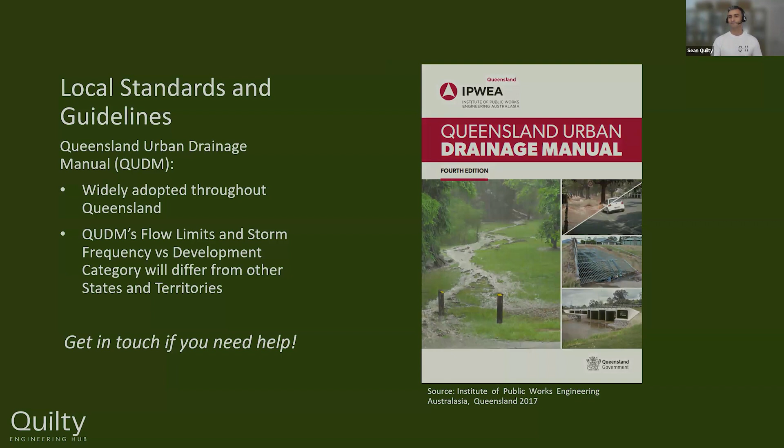So today we're going to first look at the terminology of inlets, just explain some of the key words, because it does vary slightly, especially if you start working in different states and territories - we like to use some different names. We're then going to go into the flow limits, so before you actually size and design a stormwater inlet, you've got to understand how much water is actually heading towards that inlet. Then we'll talk about some flow terminology - there's different types of flows, if it's approaching the pit, if it's going into the pit, and so on. And then finally, we'll look at how we can read inlet charts.

And hopefully I come bang on time and we'll have heaps of time for questions at the end as well.

All right, so what we're going to be focusing on today is all about stormwater inlets, but it's really focused on urban environments, so where you've got your typical roads with kerb and channel.

Typically when we get into those urban environments, they're really densely populated. So you'll have subdivisions, CBD, really heavily populated areas. And that comes with a few constraints.

Spatially, we don't have a lot of room, so we've got to try and manage flooding within a really small amount of space. Everything's just jammed in. We've got a lot of vehicle movement, so we need to think about how people can actually drive safely through rain events and flooding events as well. And we've got a lot of pedestrians moving around as well.

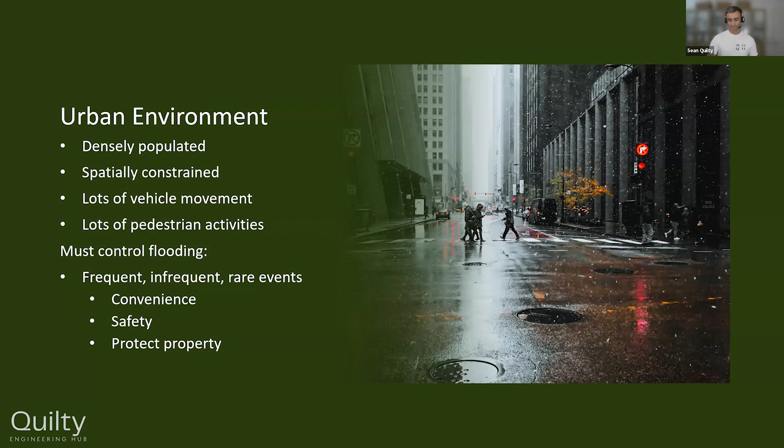So that's kind of what we're dealing with when we look at urban environments. So how do we solve this? Well, this is where longitudinal drainage comes into it.

Now longitudinal drainage is kind of the technical term, but you'll hear in the industry probably more often pit and pipe. So if you're looking at a pit and pipe design or system, this is what we're talking about - a combination of stormwater inlets connected with a series of underground pipes. It's all a gravity-based system, so it relies on these pipes being laid on a grade, so all that water will just flow under its own gravity and empty out.

So these systems are designed typically to be free draining. Once the rainfall event's finished, all these pipes drain out and they're dry, ready for the next event. So the majority of pit and pipe systems in Australia pretty much discharge to either a creek, a river, or an ocean. Or if we go inland, there might be some decent sized dams, but it's pretty much free draining for the majority of Australian environments.

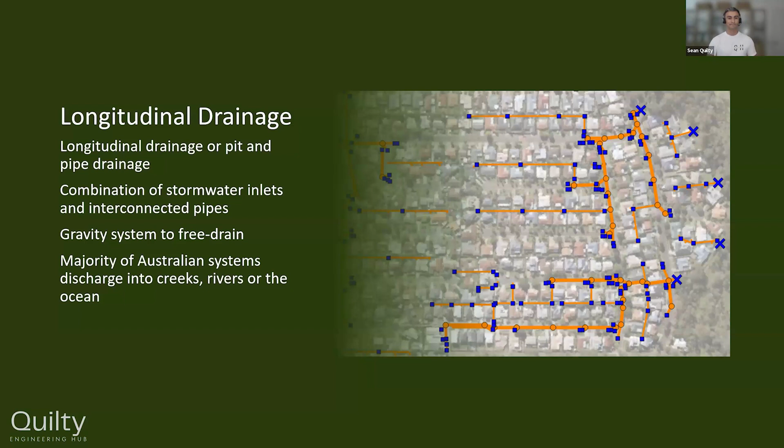So this is where we use longitudinal drainage - we need to reduce the flooding. So what we try to do is transfer all of that flow that's happening above the ground, on the road, on the footpaths, and push all of that water into the ground. We've got to somehow transfer that through, and that's where we get these inlet structures or inlet pits to actually let that water drop underground and then discharge through a series of pipes.

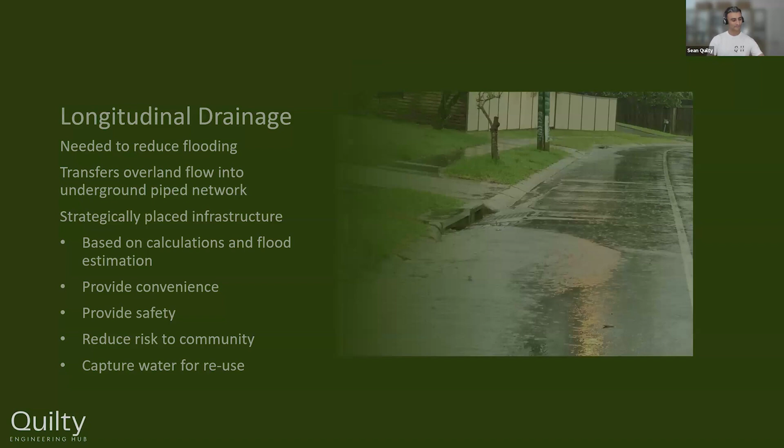So when we look at stormwater inlets, typically there's two classifications. You can have a stormwater inlet that is in a sag position, and we'll call that a sag inlet, or you can have an inlet on grade. So essentially, in a sag pit, your water is going to come from both directions. Your topography, your ground is actually coming down into a low point, and so that water is just going to sit there and pond. That's where we'll have a stormwater pit to allow that water to go into a sag inlet.

So they're the two things we're going to look at today: sag pits and on-grade pits. Now, there's lots of different names that we use for these things. We can call them inlets, we can call them pits, they're called gully pits, especially in southeast Queensland.

And then we're going to look at another type, which is a field inlet, but they can also be called drop inlets. And if you head up north into the Northern Territory, you'll start using what we call side entry pits. And elsewhere in Australia, you might call them kerb openings. So it's essentially looking at that kerb, it's just basically the kerb opening up and allowing water to spill in. Heaps of different names, but they all mean the same thing—we're trying to get water from the top of the surface and drive it into some pipes.

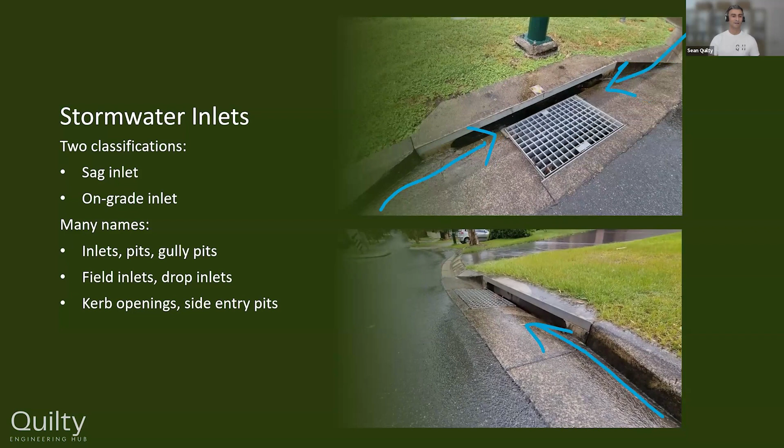So we did talk about storm frequency last time—how likely is a particular storm going to occur in any given year. We can split up this storm frequency into two classes: minor storms and major storms.

Typically your minor storms occur more frequently. That's where we will look at implementing underground flow, so our pit and pipe design pushes that water under the ground. But we can only do that for minor storms, because the more water you get, if those floods become bigger, then your infrastructure, your pipe sizes, your inlets have to be much, much larger. So there comes a point where it doesn't become practical or feasible—you won't be able to afford or even fit the infrastructure in the space you have. So it's a bit of a balance of how much water you can actually capture.

Then when it comes to major flow, that's where we're looking at the very rare, infrequent events, but a massive amount of water flowing through our roads and properties. So that's where the pit and pipe design basically becomes completely full and over capacity, and it will start to bubble up and surcharge.

And that's where we try to push all of that water into an overland flow scenario. So we'll allow all that major flow to actually run through your road corridor, or add larger drains and open channels and drainage reserves to get rid of that water.

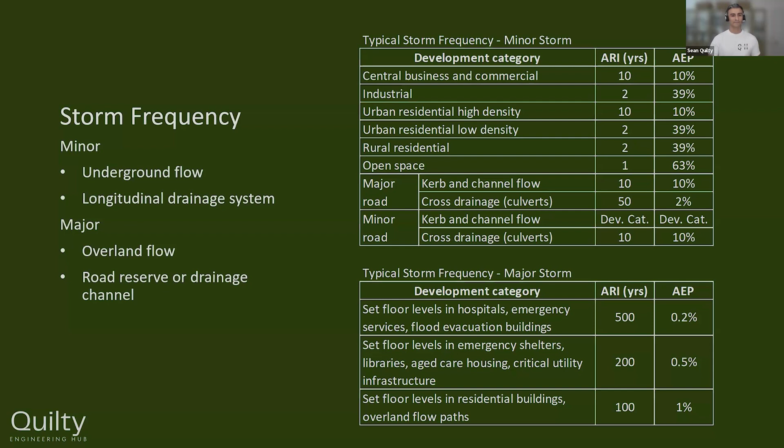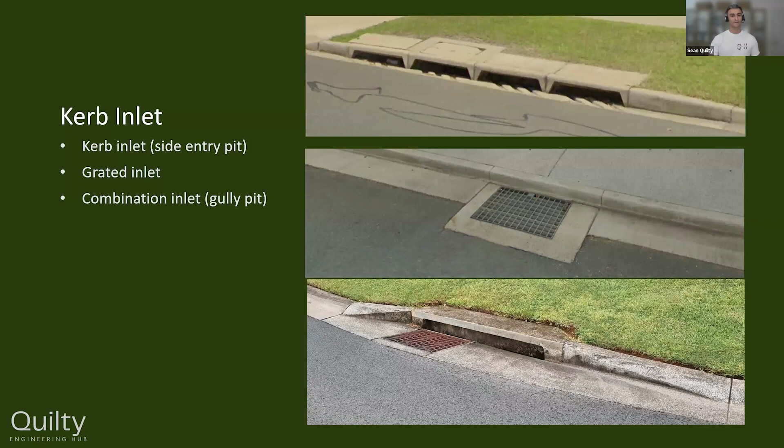So let's look at some of this terminology. In a kerb inlet, typically you're going to have the actual kerb opening, and water will be able to spill in.

You'll have a lintel, which is a structural reinforced bit of concrete that will actually withstand any wheels that might park on top of it or drive on top of it, and keeps that shape.

Now, in that kerb opening, water will actually come into the kerb and then it drops into this trough. That trough is like a little internal channel that just funnels that water into our chamber.

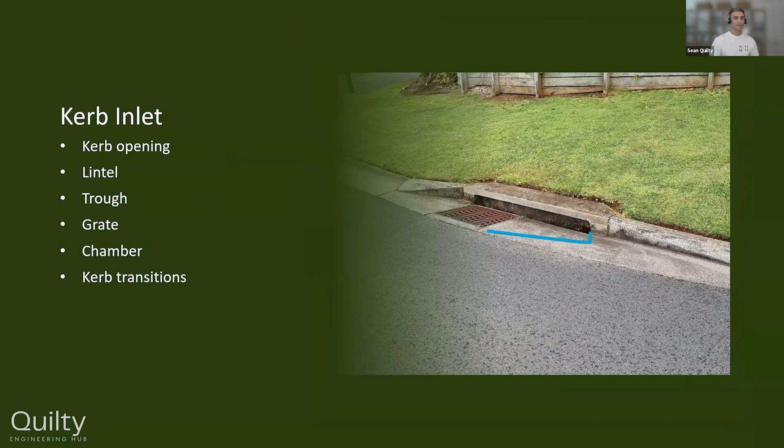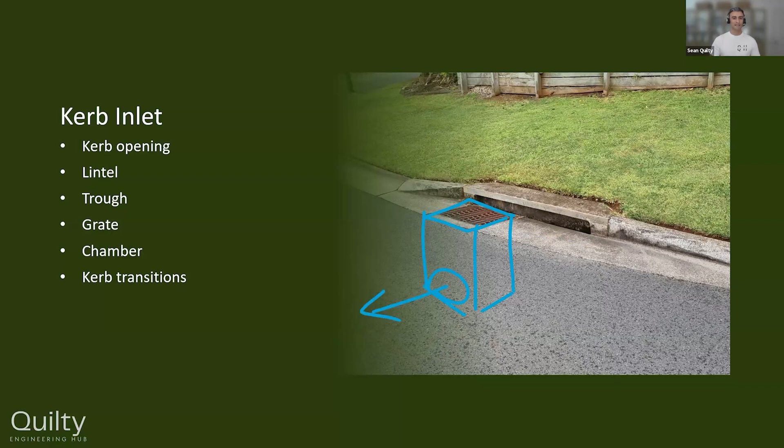We have our grate, and then we've got the physical chamber underneath. Now, this is just basically a nice big concrete box, essentially, so that water just drops in. And then out of that chamber, we will have any stormwater pipes to connect and discharge that water elsewhere.

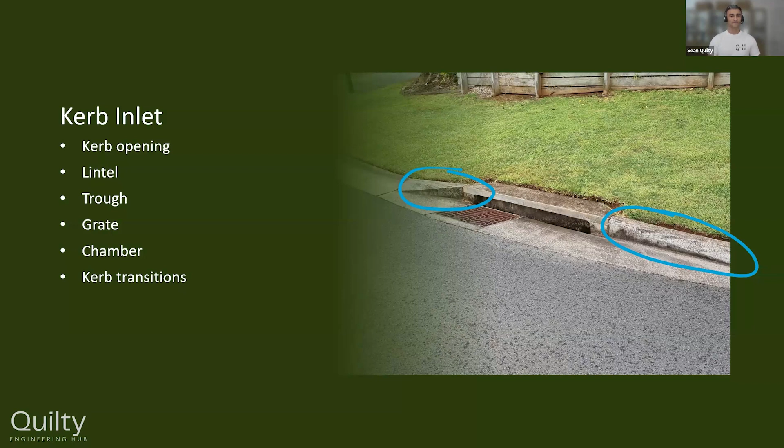And we also have these kerb transitions. Typically the kerb itself, upstream and downstream of the pit, will be constructed using a kerb machine. They'll form that kerb and then stop about 1 to 2 meters before the actual pit, giving a bit of space for people to work on and construct the pits. Then somebody will come in and hand form that last transition between the kerb and your lintel itself. So they're pretty much all the elements that you'll find in a kerb inlet.

We then have field inlets, or in some areas we'll call them drop inlets. Typically these field inlets are positioned in a sag, so these are a sag pit type, in a low point. And as the name suggests, usually it's out in the field, so it might be in a park area or a vegetated sort of area, grass, plants, and what have you.

Usually we've got three different types of field inlets. We have a flush mounted grate, which is the top left, so that grate is flush with the surrounding surface. We have an elevated grate, which is the top right, with a bit of a gap, probably about 90 to 100 mil, from the surface to the top of the grate. And then we have these dome screens in the bottom left. Each of them serve a different function, and they've got pros and cons for why you would use one over the other.

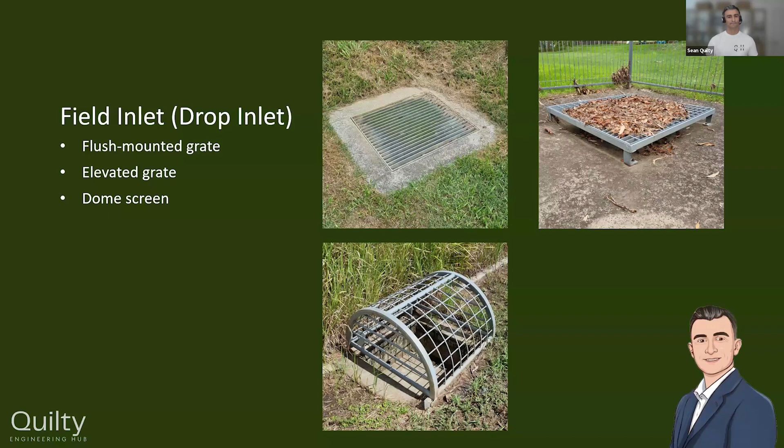A little tip: these things need to be maintained. You can see in the top right there, a picture I took shortly after a storm event, and you can see all of that leaf and litter debris has washed down into this pit and basically sat on and around it. A lot of that debris probably went into the pit and out to the nearest creek, but there's a lot sitting on top. So when the next storm happens and water comes rushing down again, you're basically blocking the majority of your pit, and it's not going to function the way we want it to when we design it.

Blockage factors are a major concern and something we need to understand and calculate correctly. So keep that in mind: your pit and pipe design is only as good as how much you maintain it.

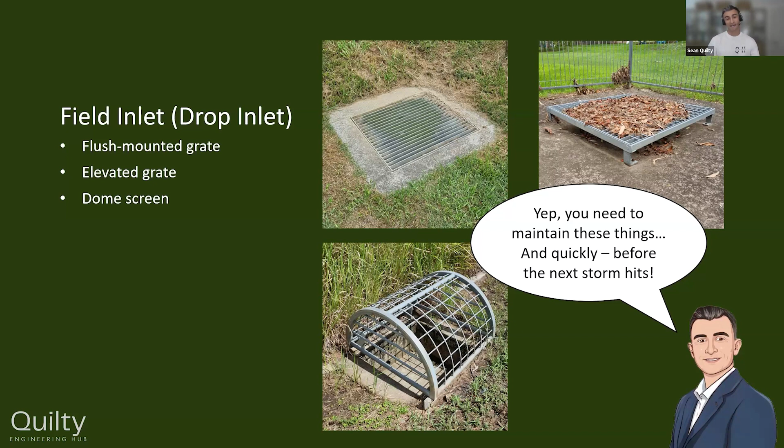So with our field inlet, we've got our grate. The water just basically ponds here because it's a sag, and it'll drop into that grate. We can have a concrete apron around there as well. These tend to be quite good because you'll have grass or vegetation here, and it's very easy for that vegetation to actually grow over the grate, which can cause blockage. Whereas this concrete apron gives you a bit of a buffer or separation, so it reduces the chance of blockage. It's also handy for maintenance crews because they'll spot it a few hundred meters away—it's very easy to see.

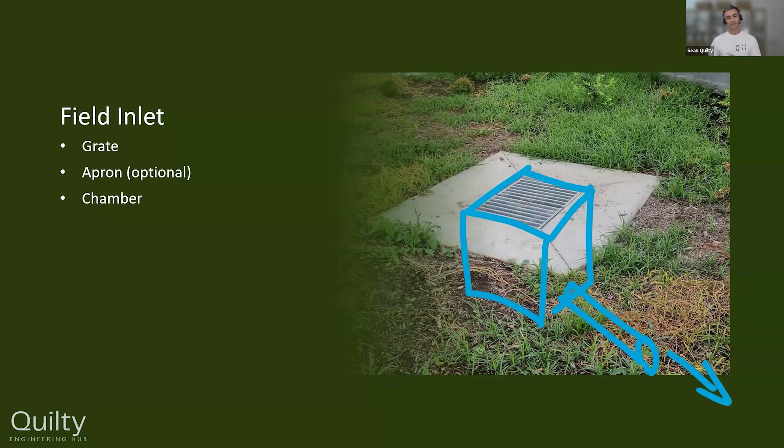And similar to the other pits we were looking at, underneath that grate we've got a chamber or a box, and the water drops in, and then we have our outgoing pipes.

All right, so we kind of understand what these inlets look like, all the different components, and really their job is to just get the water from the surface and push it down into some pipes to discharge somewhere else.

Now, the next thing we need to look at are the limitations, the benchmarks, or guidelines we have to consider. This is where flow limits come into it. So before we design a pit and position an inlet pit and decide how big that pit's going to be, we need to understand what type of flow or how much flow is approaching that particular pit, and that will allow us to size it. To do that, we jump onto the rational method, look at our catchment, and calculate for a particular storm frequency how much water or what discharge rate will be approaching the pit.

So a few things we need to consider. First, we need to calculate the approaching flow, but we need to ensure that flow width is an acceptable width. You can see that water there is kind of widening out almost to the line marking. So how wide can we actually go? Can we go a little bit into the track of a car? Can we go right up to the crown? Can we just submerge the whole lot? These are the sort of things we need to look at.

We also need to look at flow depth and ponding depth as well. So if we have a sag pit and it's in a low point, and your road sort of comes down here, how deep can we allow that to actually pond until it becomes unsafe?

And then we have another term, which if you're new to stormwater design and pit and pipe, you will hear: depth velocity product, or the DV product. What this does is take the depth of the flow multiplied by how fast that flow is running, and you get a certain number. Then in our guidelines, we'll give you a limit of what you can push up to that point, and after that, it becomes unsafe.

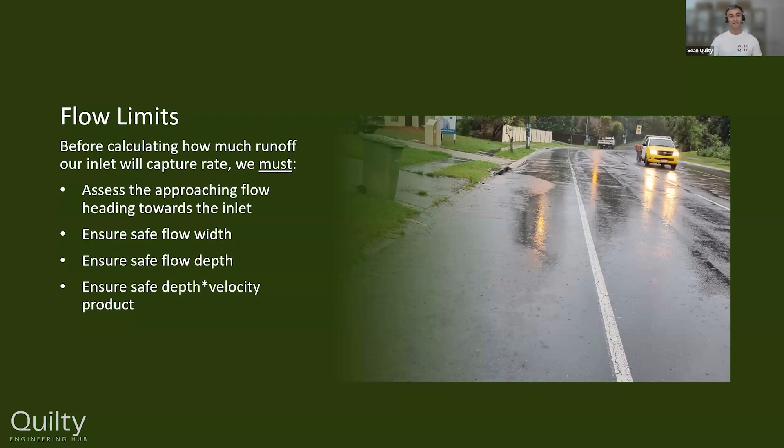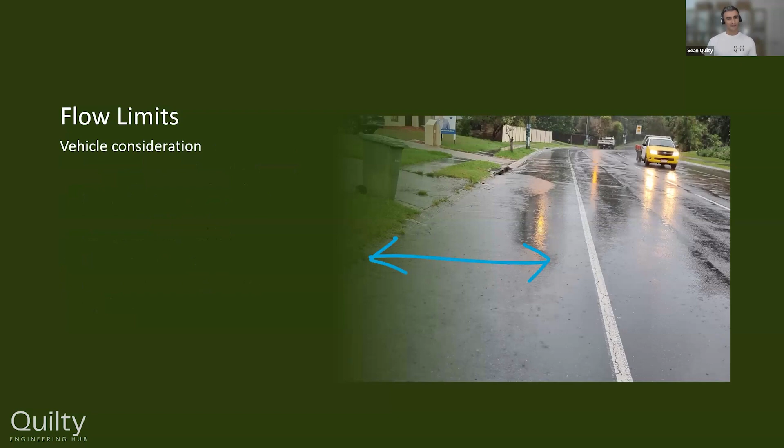So when we look at these flow limits, we've got to think about the vehicles. Is it safe for a vehicle—in this case it's a parking lane—but if that flow width was to flow into our travel lane, what's the limit and where does it become unsafe? So we think about the vehicles.

And we also think about pedestrians. So at a bus stop, we've got to think about people trying to get on and off a bus, and how wide can we have that flow? Similarly, we look at pedestrian crossings as well. So if you're going to cross a road, there's a good chance water's going to be running down that road. So how wide can you go before it becomes inconvenient is one thing, but then also unsafe.

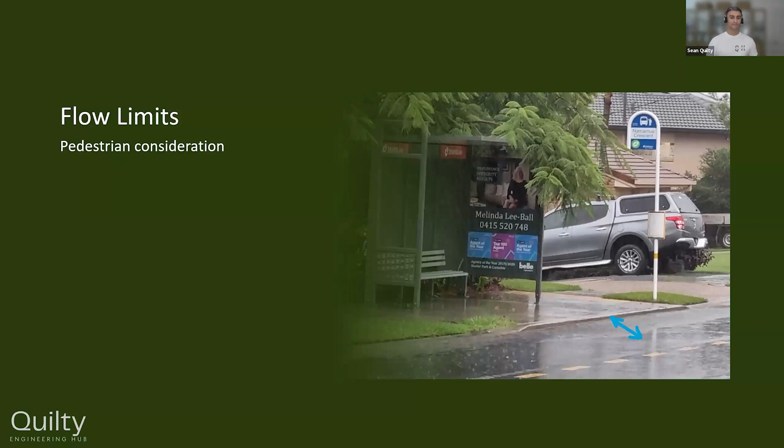So I'm not going to go through this in great detail, but now that you have the webinar and recordings, you'll be able to see these and reference them pretty quickly. But typically, if you're looking at just some thumbsuck values to remember or keep in mind...

Generally, if you've got a typical subdivision, a minor road with not a lot of traffic, in a minor event you're allowed to flood up to the crown of the road, which is a lot of water flowing down the road to that point. But at an intersection, you don't want that whole width of maybe 2.5 to 3 meters of water running down, because there's a good chance it'll flow over the intersection and cause flooding and an unsafe driving environment. So there we need to reduce that flooded width right down to 1 meter, and we do that by incorporating more inlet pits.

Another thing to keep in mind is when you have pedestrians, so crossings or bus stops, it's usually about 450 millimeters as the widest you can have for a flooded width. If you need to think about it, just picture a nice big step. If you can physically step over that flooded width, then you're on the right track for a minor event.

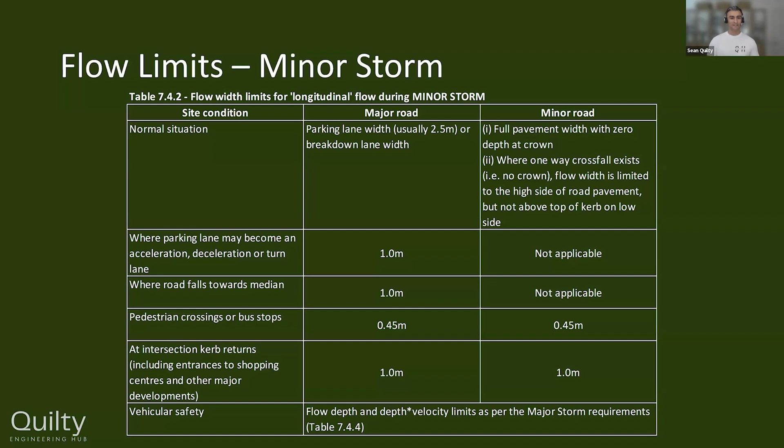This next table here - the previous one was talking about longitudinal flow, flow running parallel with the road. This one is for minor events, but for transverse flow, so if water is actually overtopping the road and going across perpendicular to it.

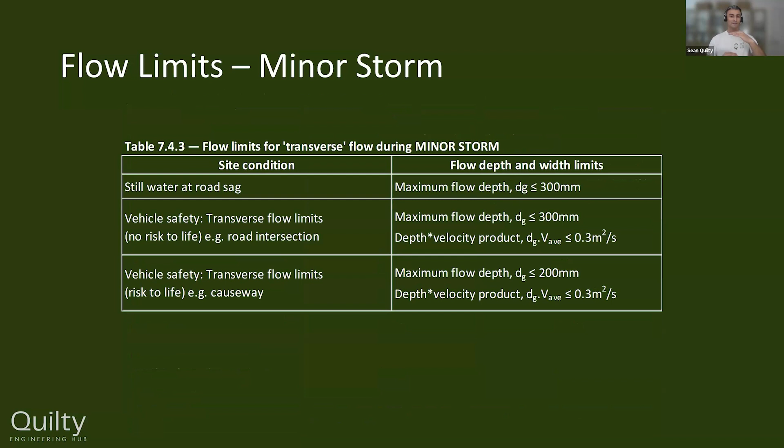The top one, which is probably good to remember as well, is still water at a road sag. So if you've got a field inlet or a gully pit that's in a sag, typically you want to keep that ponding depth below 300 millimeters. Just some nice numbers to keep in the back of your mind for your next design.

We then get into major storms. As I said before, with pit and pipe design you typically break it up into minor storms and major storms, and those are the calculations you will run.

I'm not going to run through this, but if you need a takeaway for major storms: if you're looking at flow running down the road, parallel to it, if you keep your major flows below or at the top of kerb, generally you're okay. Obviously there are heaps of scenarios where you go a bit further, but typically if I'm doing a concept design, I'll jump in and just assess based on top of kerb, and I know I'll be right for pretty much most scenarios.

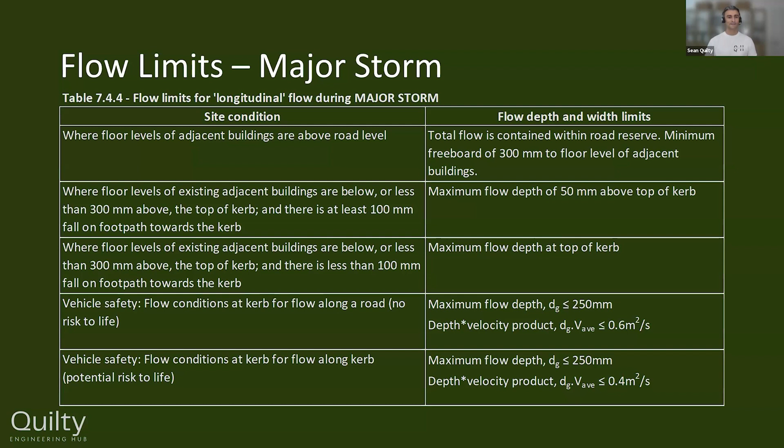So imagine your road's heading down and your car's driving down there, but then you get a flow coming at right angles, it's going to want to push your car over. Anyone watching the news the last couple of months would have seen, for example on the Gold Coast, a lot of footage of cars getting knocked over and washed away at floodways. That's all based on a DV product, that depth velocity product.

I can't keep going on about that - I would love to, but I'm just watching time, so I'm going to keep going ahead.

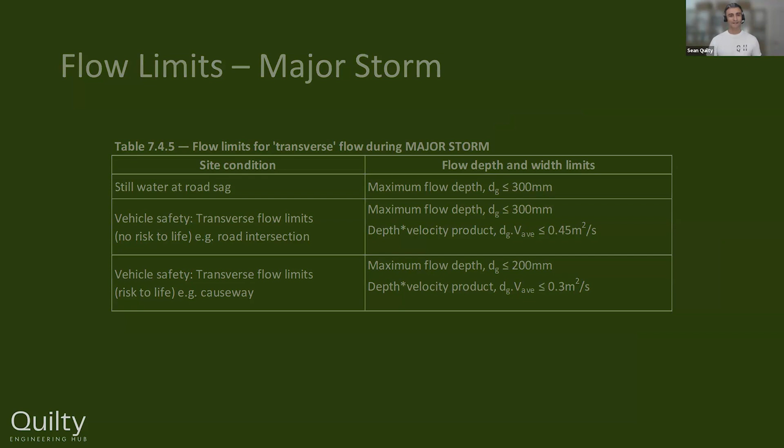So when we look at this approaching flow, or the limits we've got to comply with, one of the things we need to do is estimate how much water is running down that road, or what's acceptable. This becomes a bit tricky because you're going to have all sorts of road grades, all sorts of configurations of roads, your crossfall, your width, and different kerb types.

But what we do have is one equation that we can use, which is Izzard's equation. If you haven't heard of that, definitely take a note. It looks complex, but it really isn't. It's basically just a bit of a rehash of the Manning's equation for a triangular section.

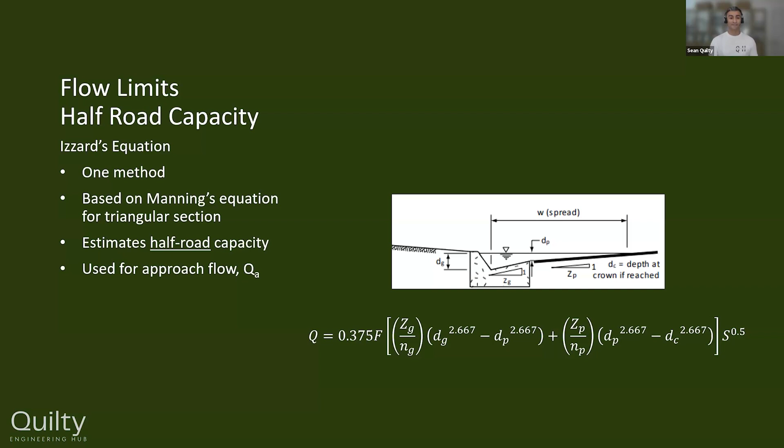This is what we use to assess that approach flow and see if it's safe. The way you can do that is by creating a spreadsheet, maybe something like this, where on the left you'll have your road grade all the way down, so 0.5% grade, 1%, and you filter right down. Then as you go across the table, you can have varying depths of flow. The first column is 30 mil deep of flow, the next is 40 mil, 50 mil, until you go all the way up until the road's full and over capacity.

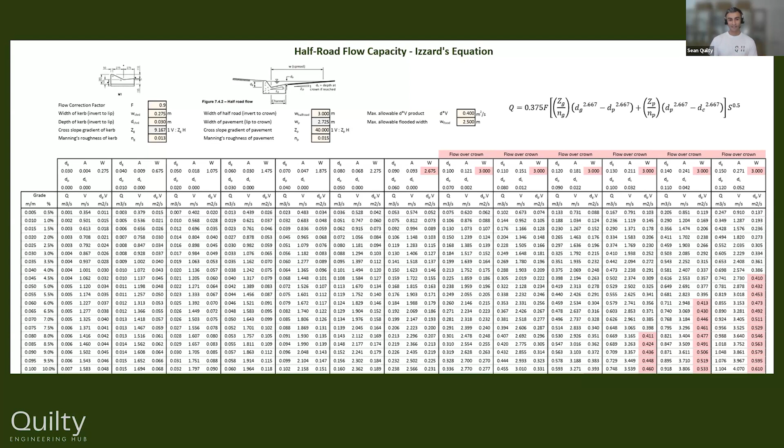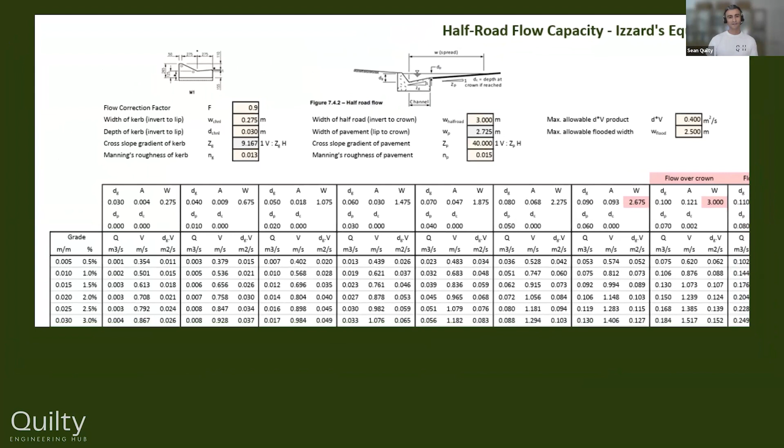So if you have a table like this, it's really easy to look up. You calculate your approach flow, and then you read off this table, and that will tell you if you had, say, 300 liters a second heading down your road, you can quickly see how wide that flooded width is, what the DV product is, and what you can also do here on the right-hand side, this is a spreadsheet we create here at Quilty Engineering Hub. I put in a DV limit and a flooded width limit. Then on my spreadsheet, anything that turns red shows me that it's unsafe, or the flooded width is too wide, or the flow is actually overtopping the crown. So it's a nice good lookup you can use.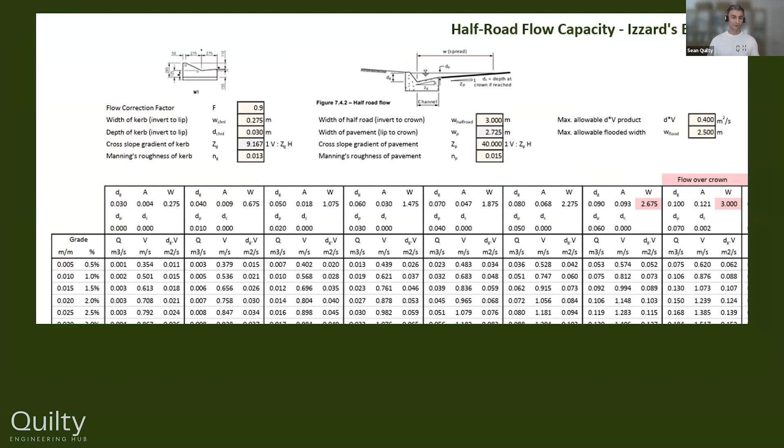Now, QUDM, in the back of the QUDM manual, they've got a few tables exactly like this. But this spreadsheet allows you to change the kerb types, the flooded width, the road widths, crossfalls, and configurations. So you can do something like that.

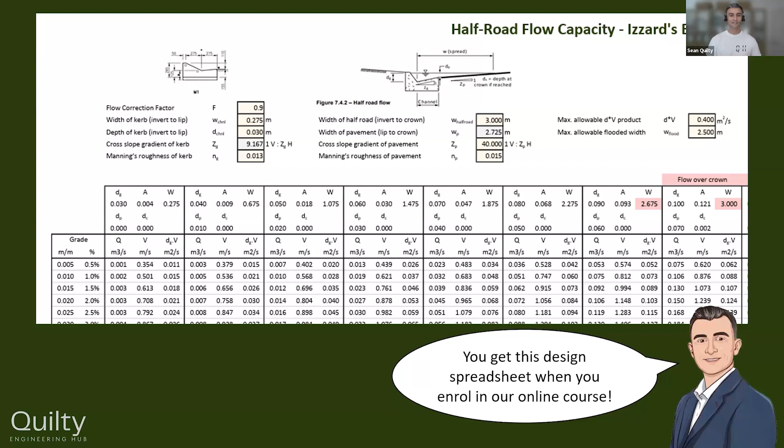So we know we have inlets. We need to push that water underground. And now we know that there are limitations that will help us figure out how many inlets we need or where we need to put those inlets.

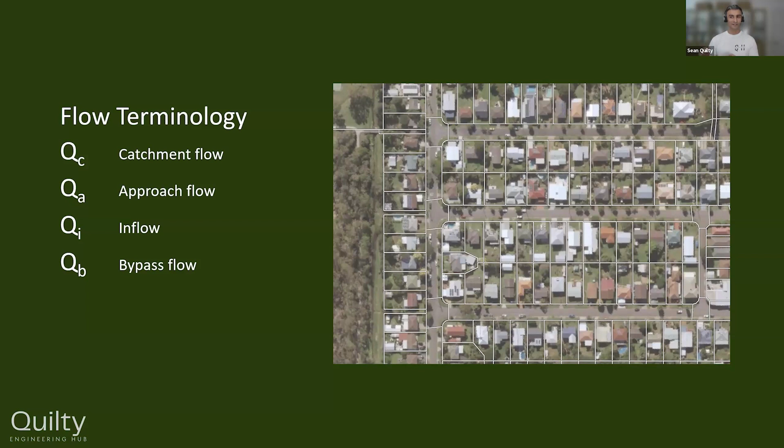So now we look at some flow terminology. Q being the flow rate based on our rational method calculations. We know that the letter Q is basically peak flow. But we can then split that up further and say that we have a catchment flow, an approach flow, an inflow, and a bypass flow. And if you're doing pit and pipe design, you need to understand this quite well.

So one of the first things we need to do is understand our catchment. We can understand the topography by obtaining contours, survey data, site visits. There's a lot of things we can do to actually understand where the road and the lots all fall. That's our first thing that we need to be able to do, really understand your catchment.

Once you've done that, you can then understand how the road falls or grades, and then you know any inlet pit you put on those roads that are falling in one direction will be on-grade pits. You can also identify where the road has low points, so that will be a sag location, and you'll need sag pits in those locations. With that topography, you'll also understand how those lots will be able to grade. Are they grading to the road, or are they grading away from the road? That obviously affects how much water or runoff will head towards certain pits.

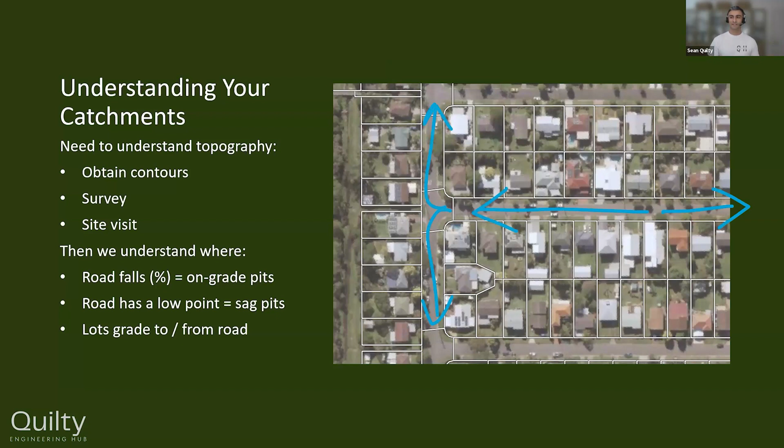So here you might look at it, you might have some contours, and you might identify that there's a crest somewhere in your road. At the intersection, this might be at a high point, and so the flows might actually divert in both directions. So you've got to understand what's happening on your site first.

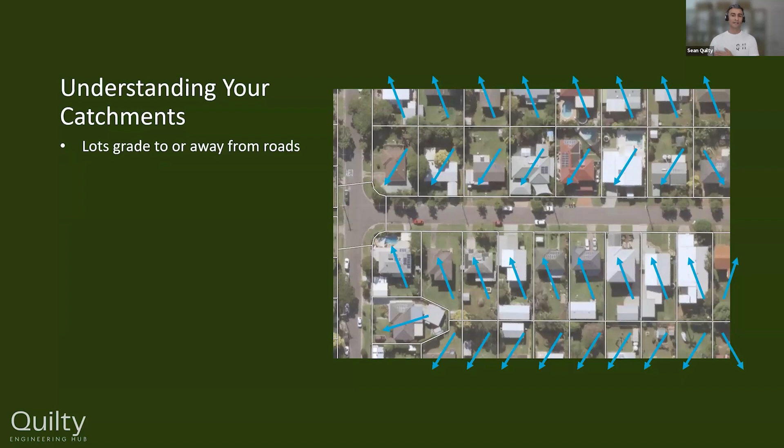So when we understand that, we can then see where these lots are all going to grade. We might have a series of lots grading towards the road, adding more flow to the road, or grading away, and then you've got a heap of flow in the back of your property. We can then look at our road crests. We know that when we have a crest or a high point in the road, it's going to push water in opposite directions.

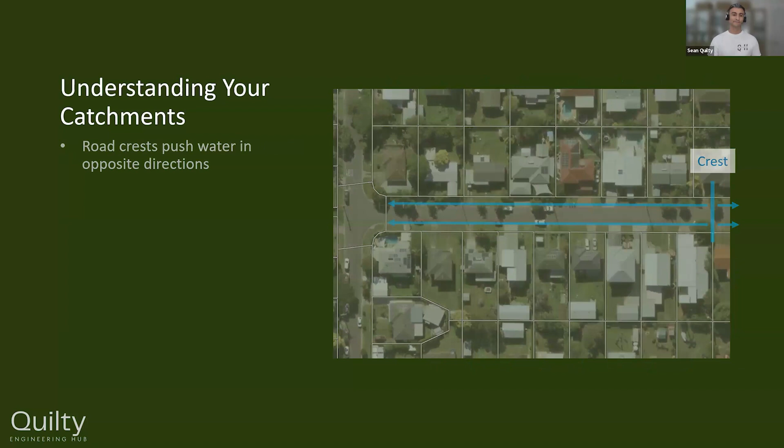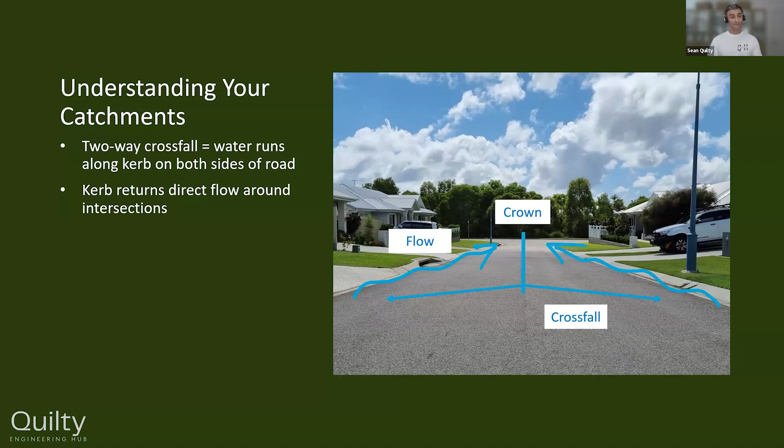When we have a typical two-way road or two-way crossfall on our road, we know that the water is going to split and head to the kerb on either side. Those kerbs will direct flow down the road. And when you get to an intersection with kerb returns, it will direct flow around your intersections as well. So this is where that understanding needs to come into it.

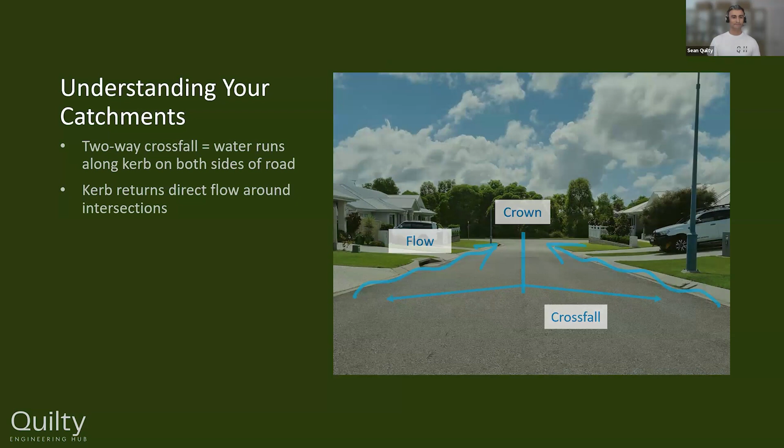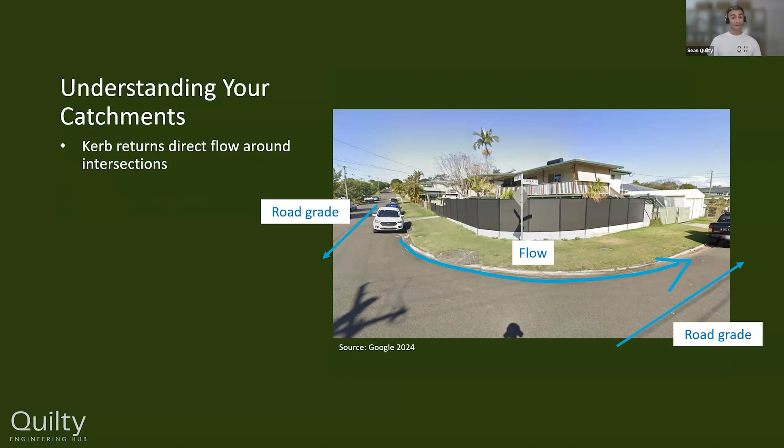You've got to really know what your catchment's doing. For example, if we had a road grading down towards us, and then grading towards the right, we know the flow is going to run along that intersection and head down there. So we understand where the flow is going to go, and then we can calculate how much flow there is, and if it's acceptable, or if we need to cut off that flow with an inlet pit.

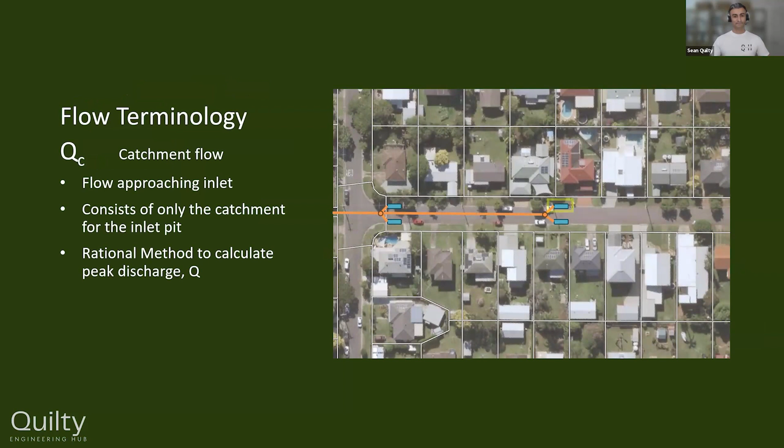So we'll look at this terminology. We will first look at catchment flow. Let's say we have some inlet pits here and then a pipe system. Let's look at this single inlet pit here. This will have a certain catchment, and so the flow approaching that inlet will be our catchment flow. Similarly, if we have another inlet on the other side of the road, we can calculate what that catchment is, and that's the catchment flow.

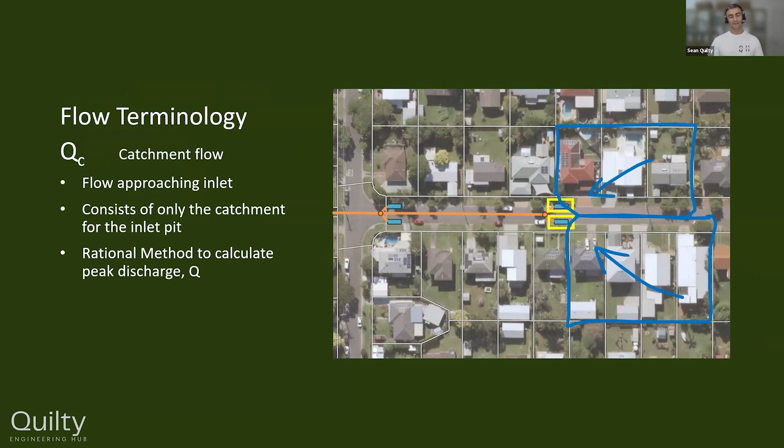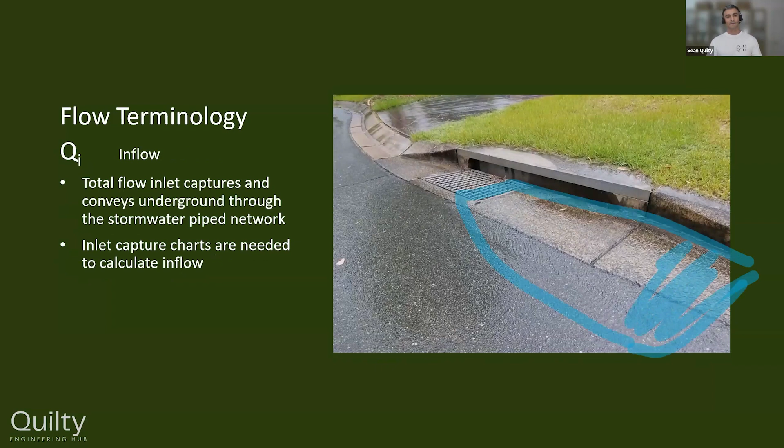We then look at the inflow. So we know the water approaching the inlet pit - we saw that that was going to be our catchment flow, and in this case we could call it the approach flow. I'll show you the difference in a couple of slides. So you've got this flow approaching the inlet. Then you're going to have some of the flow, maybe all of the flow, depending on how much, going into the inlet. And that's what we call inflow, or QI.

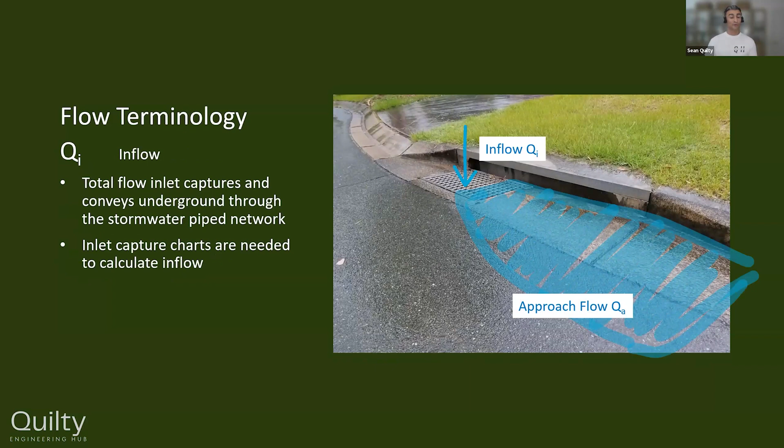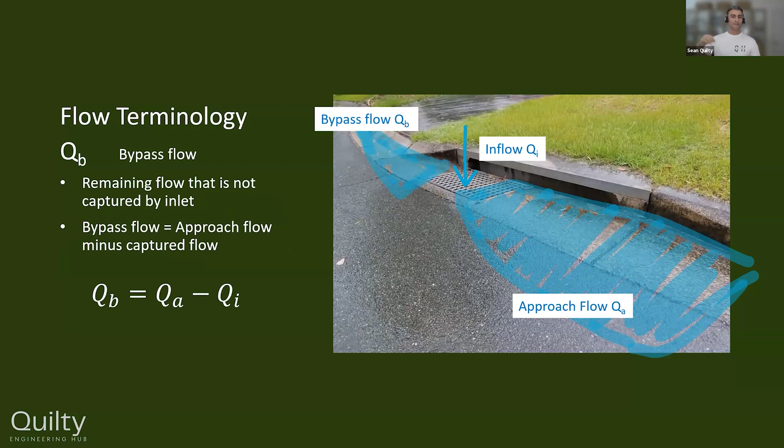Now, if there's too much water heading towards that pit and the pit can't capture all of that water, you're going to be left with a lesser amount of water, and that's what we call bypass flow. So if your road is on a constant grade and you have your field inlet, you will have some of that water that will bypass if there's enough water approaching.

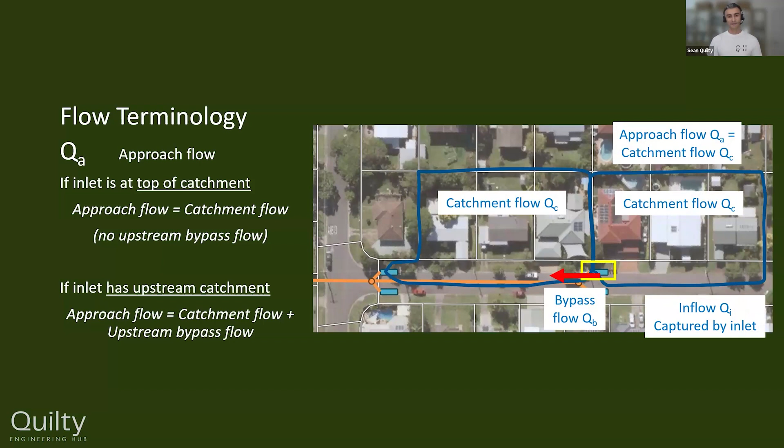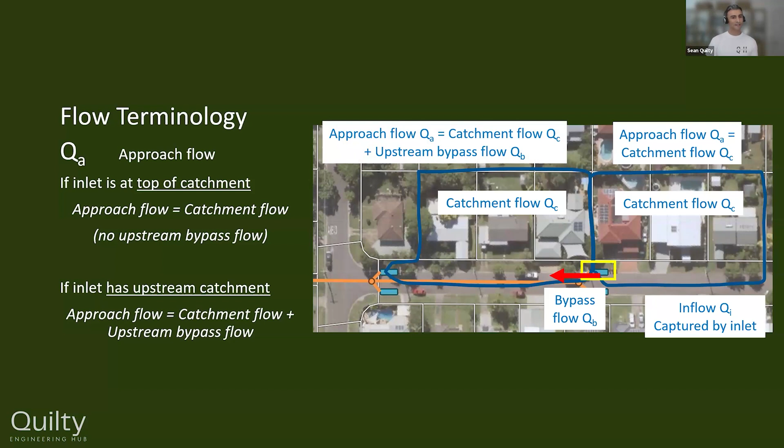If we look at the pit further downstream, we have a catchment that's heading towards that inlet pit, and we can calculate that. But our approach flow is going to be our catchment flow plus that upstream bypass flow, because we've got additional flow that's spilling or bypassing that upstream inlet. So just keep that in mind - your approach flow needs to account for any upstream bypass flow.

All right, so there's our terminology. Now we're going to look at inlet capture charts.

At this stage, you'll understand how to calculate your peak flows first using the rational method. You would analyze your catchment - where's the water all going to fall? Then you can start to position your inlet pits at trial locations, or just a bit of an educated guess of where you need the on-grade pits. And you definitely need them in the sag points as well. Once you've got those locations, you can then confirm or finalize your catchments, the area and the Q value that's heading towards those inlet pits.

You can assess your flow limits to make sure the flow approaching is not too wide, too deep, or the DV product's not too much. Once we're at that stage, we can then use inlet charts, which are based on mathematical equations, and we can look up for each specific inlet pit - you would have a specific inlet chart.

So it will say for that particular pit, if you had a certain amount of flow approaching it, it will capture X amount. And that's what we really need. And that's something that a lot of people don't realize.

If you're doing pit and pipe design, you must be across the inlet charts that are used. And that's something that is missed. Sometimes it's relied upon on the software, and you just pick a pit and let the software crunch the numbers. But really, you want to be able to break down those calculations and really assess and understand what's being used in that space.

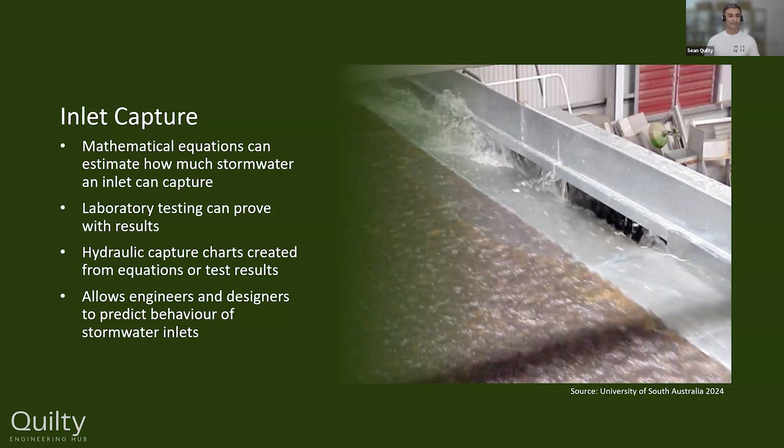So when we're in a sag condition, what we call the hydraulic performance, which is basically how much water this pit will be able to capture and push down underground. In a sag location, the performance is based on the ponding depth above the inlet opening. So you will have water coming on both directions for a sag pit.

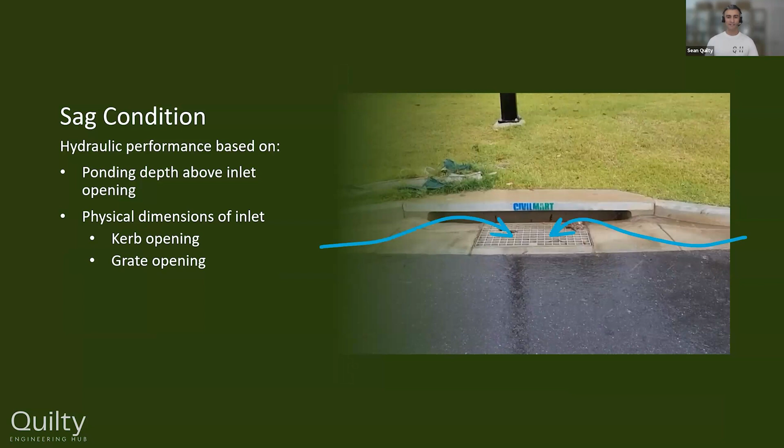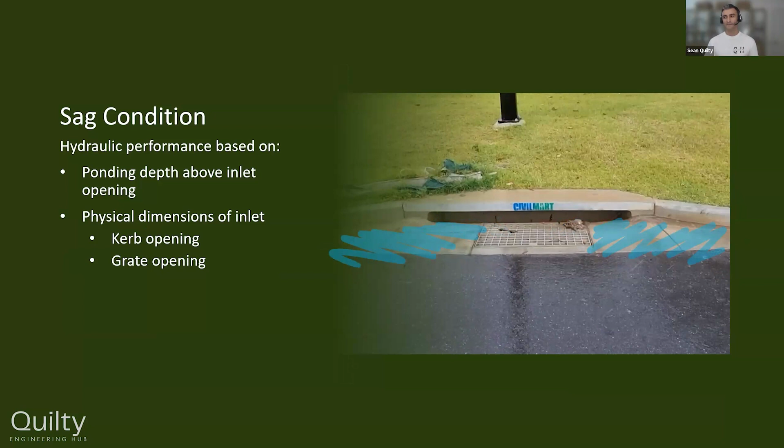And the amount of water that comes across, it'll first start quite shallow, and it'll sort of drop into the grate and drop into the kerb opening. But the more water that approaches, it will start to pond or fill up or submerge that whole pit itself.

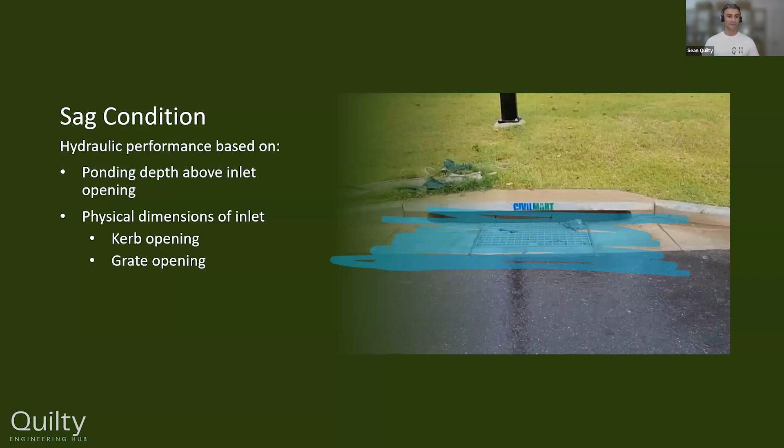And so the physical dimensions that we're really concerned about are the kerb opening, the size of that kerb opening, the grate in some cases, though sometimes blockage might ignore a grate in some standards, and then the actual depth of ponding that may be achieved. So that's how we look at a sag condition.

We need to look at first the approach flow. So how much water is heading to this sag location? Now, when we're in a sag, because the water just sits there, there is no bypass flow. The water that comes across in a minor event needs to be captured and pushed underground. So our approach flow technically needs to be our inflow. We can't have any bypass.

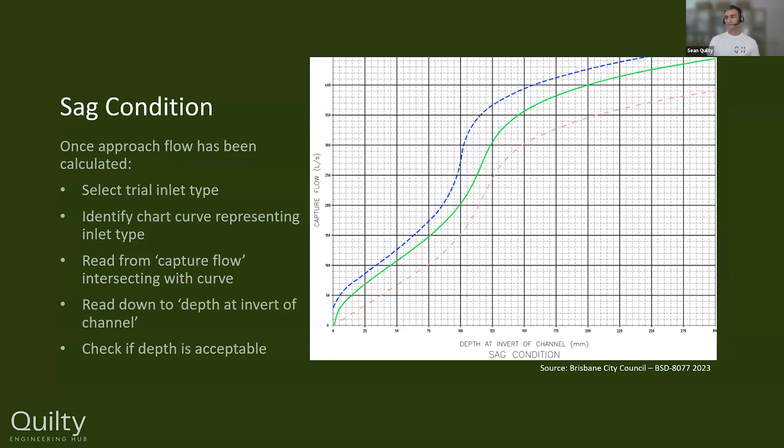So you select your trial inlet type, you identify the curve that you're going to use, and then you look at the approach flow. So in this case, let's say we had an approach flow of 250 liters a second heading to this pit, this sag pit.

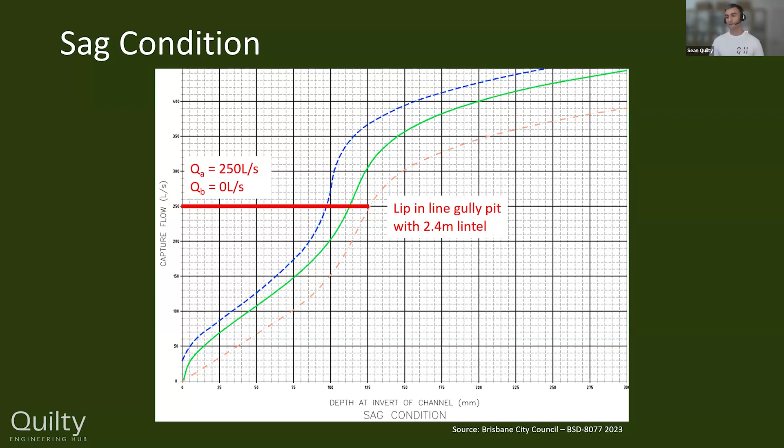We know that our approach flow needs to be our capture flow or our inflow because it can't go anywhere else. So we read across 250 liters a second. We hit the chart that represents the pit type that we're testing or that we think we can use. So in this case, it's a lip in line gully pit with a 2.4 meter lintel.

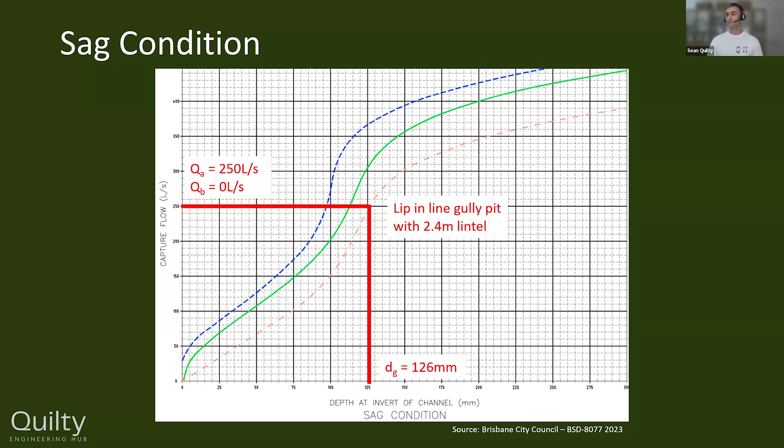Then you read down the chart and you'll see in this case, you'll need a ponding depth of 126 millimeters.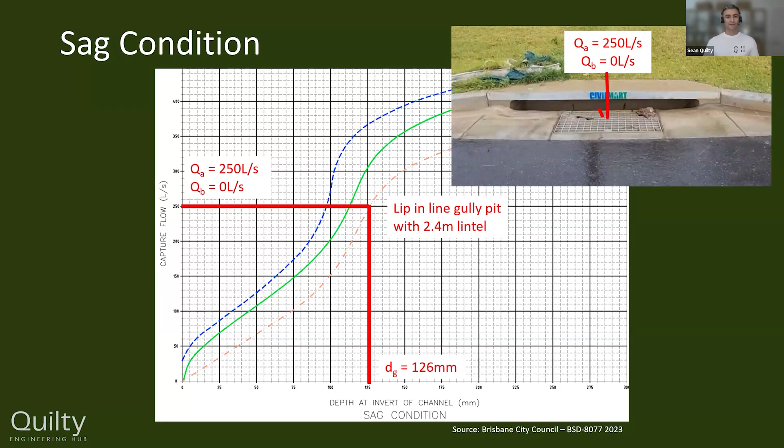So what does that actually mean in the real world? Well, if we have 250 liters a second heading to this sag pit, we need to make sure that we can allow that pit to actually pond or fill up 126 millimeters deep. So if we had that scenario and you needed 400 millimeters deep to actually force all that water in the pit, it's not going to work.

That's too deep. It won't comply with our standards of a maximum depth, or physically it may not be possible. 400 millimeters deep or even 300 millimeters, and it's still kind of unacceptable. It might build up past the curb and then past the verge and then start overtopping into someone's property. So you physically may not even be able to get up to that ponding depth.

And that's where these inlet charts help us decide whether we use that pit or if we need a bigger pit to capture more flow.

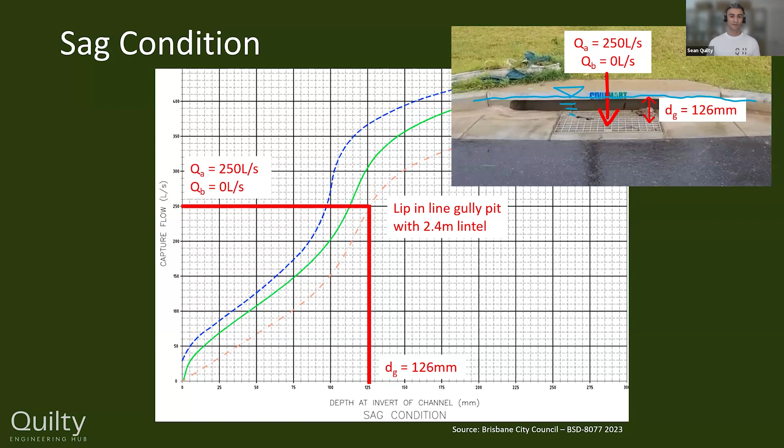And then finally, we look at the on-grade conditions. So we looked at a sag pit when it's in a low point, all the water sort of ponds there. This is now an on-grade. So the performance of an on-grade pit is based, again, on the dimensions of the pit itself, the kerb opening and also the grate.

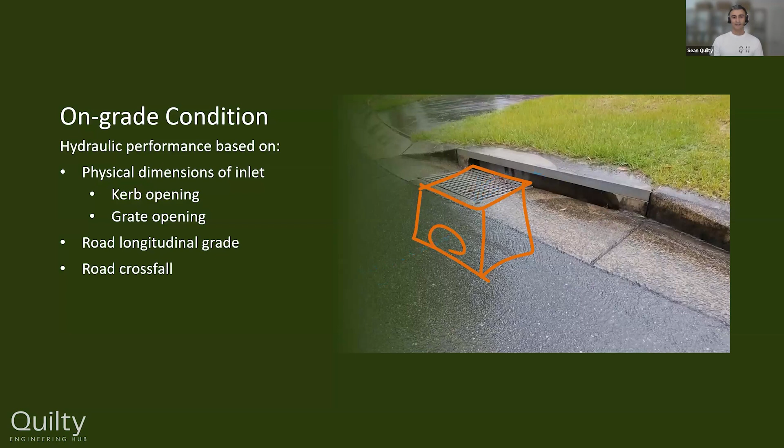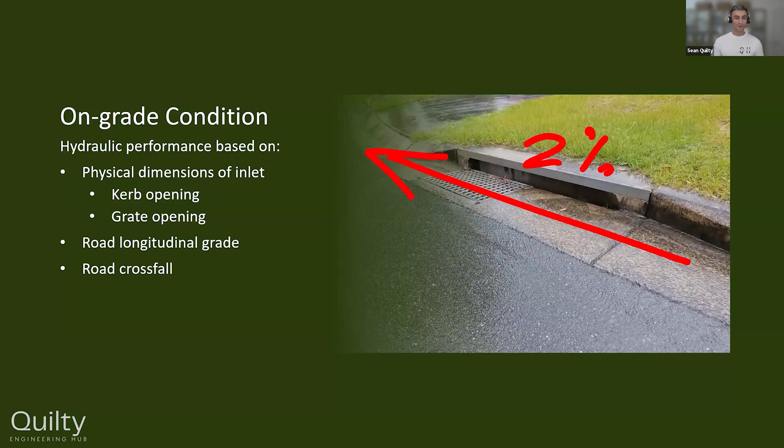And so that will allow the water to drop into the pit and then discharge through our pipe network. But the other thing we've got to consider, as this water approaches the pit and then potentially bypasses, is the road grade itself. So if you have a flat grade on your road, maybe 1% or 2%, the water is going to be traveling a lot slower, so it gives the water a chance to actually fall into our pit. If you have a very steep road grade, the water is going to be traveling really fast, and there's a good chance you'll start to get a lot more bypass flow and not as much flow dropping into your pit.

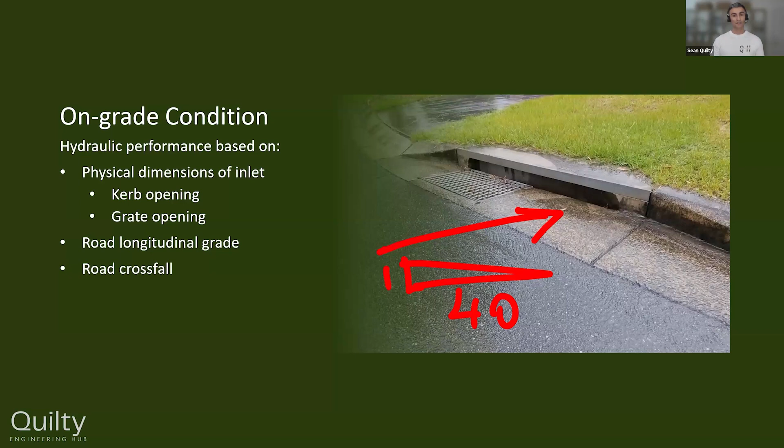The other thing we need to look at is the crossfall of the road. Anyone that's used Manning's equation for a while will understand that the deeper the flow, the faster that velocity is going to be. So if you had a road that was very flat with, say, a 2.5% crossfall, that won't have as much water being able to go into that pit. Whereas if you increase the crossfall and have a deeper amount of flow, it'll actually push more water into that pit. So those are the things we've got to look at, the road grade and the road crossfall for on-grade inlets.

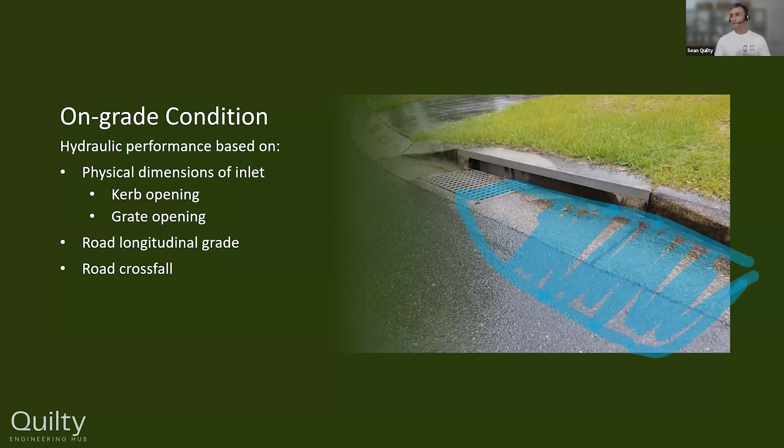So again, with the on-grade pits, we will have approach flow, we'll have inflow, but we may also have bypass flow. That's something to consider when we start looking at these calculations.

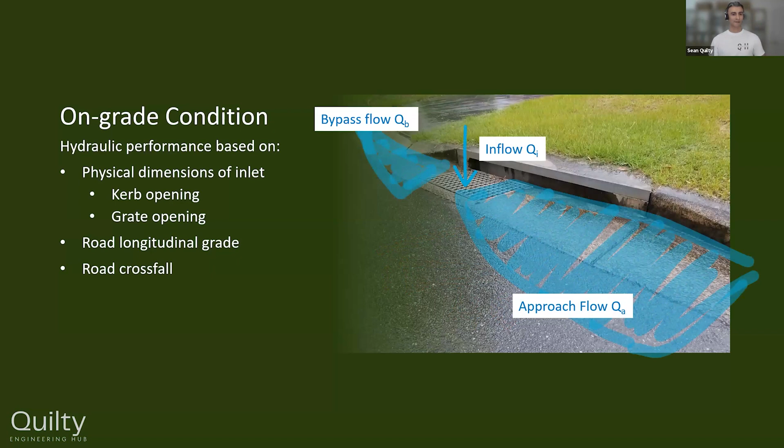So for an on-grade pit, you would have specific inlet charts for specific pit types. In this case, with Brisbane City Council, we're using an on-grade inlet chart, or hydraulic capture chart, as it's sometimes called. But this is only for one specific pit. So if you've got 5 or 6 different pit types, different size lintels, different configurations of kerb openings and grates, you will need the same amount of inlet charts.

So in this case, we need to select a trial pit. We don't know what pit's going to work, but we can have an educated guess. We can then identify the chart that represents that pit. And then we can read across our approach flow and find out how much this inlet is going to capture.

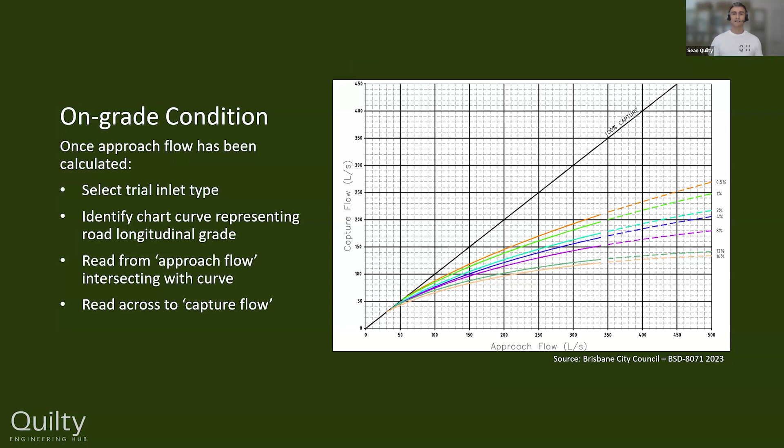So we first look at the specific chart for the specific pit. And then all these different lines that you see here represent the different grade of the road. At the top, we've got a very flat grade of 0.5%, all the way down to the bottom line at 16%. The more you play with these calculations, you'll start to see different trends or relationships. Typically, the flatter the road, the more water your pit will capture. The steeper the road, the more bypass you will have.

So let's say we had a road grade of 1%, and let's say we calculated our approach flow at 250 liters per second. We simply read up our approach flow until it intersects with our road grade profile, then we read across and find out how much water that pit will actually capture. In this case, it will only capture 160 liters per second. That 100% capture line, the 45-degree angle black line, is saying that if you have an approach flow, it will capture all of that flow. What you can see here is there is no line that even comes close to that 100% capture unless the flows are really, really small.

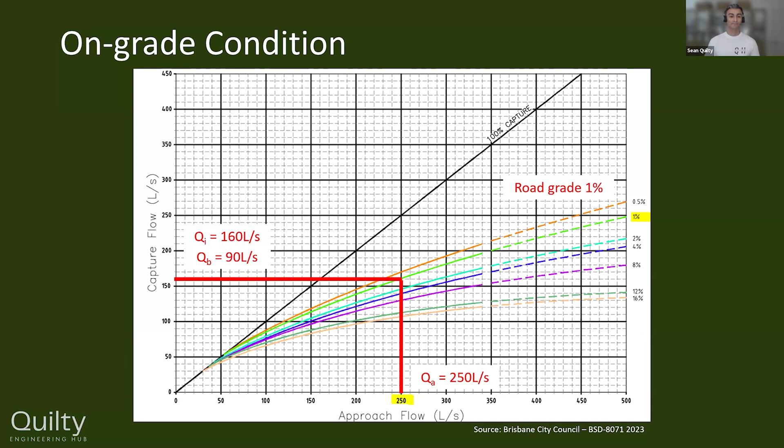So again, what does that look like in the real world? We might have 250 liters a second heading towards the pit, but only 160 will fall into the pit itself and through your pipe network. So then you have this 90 liters a second that will continue on downstream.

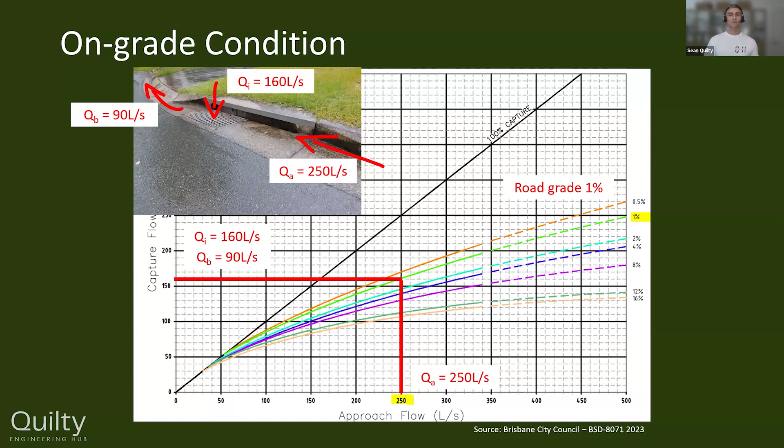All right, so that was a bit of a crash course. I wish I had another 3 or 4 hours to elaborate, but we don't, unfortunately. But these are some of the common scenarios that come up, or things that you might hear around the office that maybe you don't quite understand or aren't confident in.

So looking at custom inlet charts, if you've got different configurations, double pits, or a really long trough where you've got to extend a series of kerb openings, you'll need custom inlet charts. A lot of people ask about that - well, where do we even find those? And the answer is you create those. You have to do the mathematical calculations and then you produce those charts, just like what we saw from Brisbane City Council. There's various inlet configurations.

A lot of people don't quite understand the difference between gully pits and field inlets, or a big one is field inlets when they're on grade. A lot of people will put field inlets on an actual grade itself, and I can tell you right now that they do virtually nothing. You might as well just rip them out and save a bit of money and try to find other ways to control the stormwater.

Different states and territories and councils - Brisbane City Council has these hydraulic capture charts, which is great, but there's a lot of other councils and other states and territories where they don't have that data and they just don't know where to go or use that information. I've got to stress, if your inlet is not exactly the same dimensions as, say, the Brisbane City Council inlet charts, you cannot use those charts. Your pit will behave differently, and then you're at risk of underestimating or not calculating your pit and pipe design correctly.